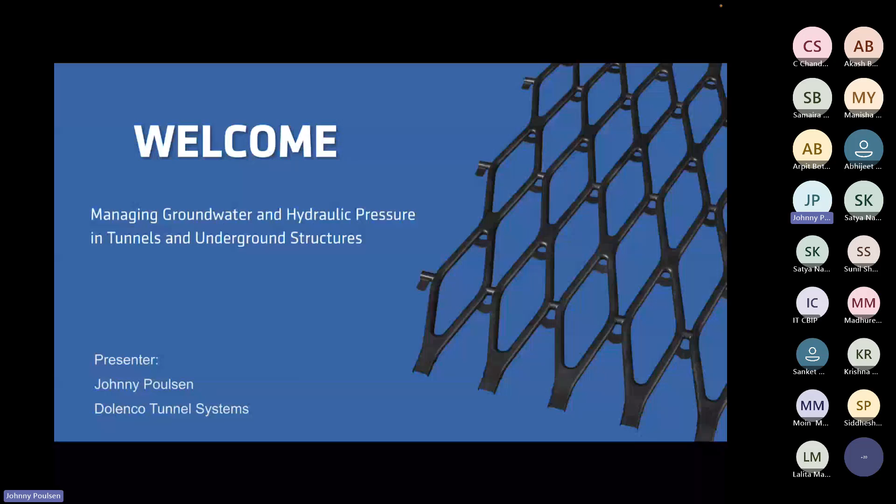When you start a tunnel project, we have to think about this actually quite dramatic work we are doing by removing part of the mountain. What is happening is we are changing the entire dynamics of the mountain. We excavate a whole cavity, and to use this cavity safely over a long time, we build some kind of lining inside it.

The dynamics of removing all this material will change, because it has had millions of years to reach a certain balance in the soil around the cavity. It's very dramatic—the whole mountain will try to find a new dynamic in this new situation. So what does it do? It starts putting pressure into the tunnel, and it also starts changing the way water flows. These factors are very important at the beginning of the project and even over the long-term use of the tunnel.

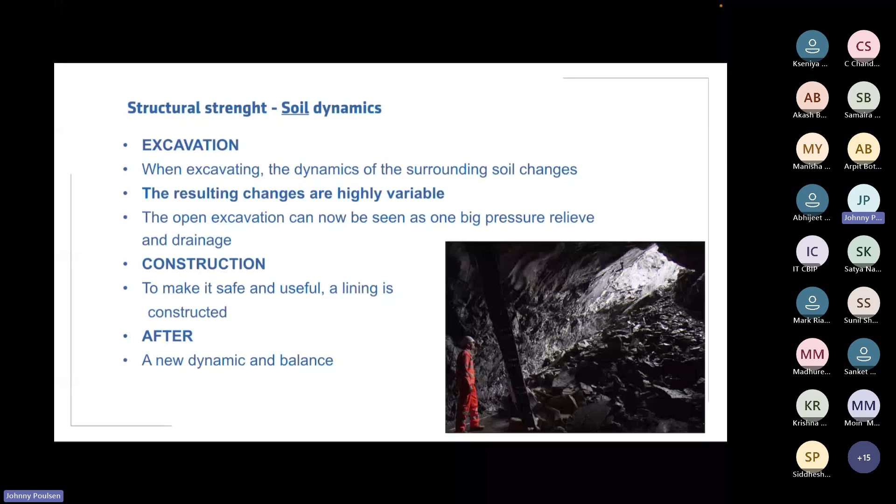These linings are, of course, not without problems when we build them. As you see here to the right, you see some of the water problems we have. We don't know if it's going to be like this before we start digging, but sometimes we see areas where water is actually flowing in, trying to make a new balance inside the structure. So when we have these problems with water coming in, the water pressure and accumulation inside, we have to think about that even when we start excavating.

During construction, we have to make new pre-grouting, or some line drains, or other components of the lining that make it possible to build this lining. If there's too much water coming in, the shotcrete will not stick to the surface, and you cannot really get any further. So we have to have a lot of different tools to manage this, which makes it very complicated to do this lining and make a safe, long-term project and tunnel.

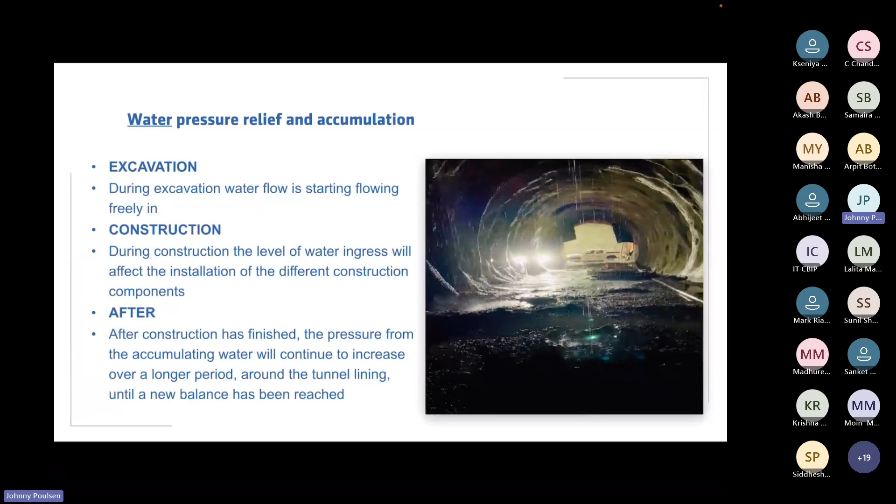So with that in mind, we can look at some of the specifics of what makes it a problem. First of all, we have the safety issue when we are constructing - water coming in, the risk of rocks falling off. We need to make an initial lining that can actually hold the structure while we're working.

When we're doing the lining designed for the individual project, we will often have the need for repairing this lining during construction, simply because water is coming in and damaging the lining. Again, if you're in certain areas, up in the mountains where it's very cold, ice will form. That is also a source of many different types of damage, even fatal, if the ice falls onto a car, onto a train, or onto the roads.

So these are the things that we really want to avoid by making the proper lining design. If we have these different problems, it is very costly to repair them, and it takes a lot of time. Closing down the tunnel is also a big cost for society, and adds to the cost of the problems.

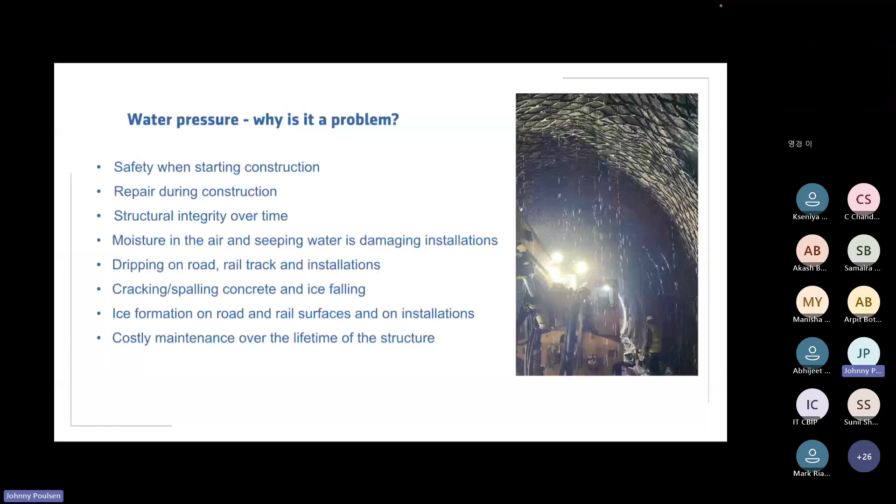So specifically, what are we doing when we have all this water? We're trying first to block the water from coming in by grouting, making waterproofing, so the water doesn't have a chance to get in anywhere. Second, we are using diversion, where we use different types of drains, pipes, or sheets, simply to let the water run somewhere, and this way avoid that it comes through the structure.

The last option, often used since it's not possible to stop the water, is you simply let it drip, and then you take on the long-term problems: repairing, doing injection work, repairing the concrete, and repairing a number of the installations in the individual tunnel.

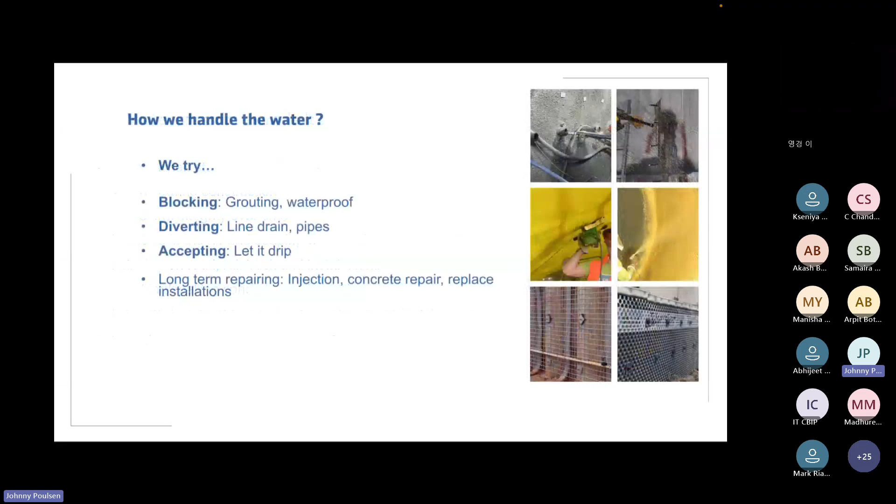So when we are going to design this lining, what are we looking at? First of all, we have the concrete, the shotcrete. For that, we can do a number of things - we can make it fast setting, we can use additives for less cracking, and we can even use very heavy lining, using extra concrete to take the pressure and the water coming through.

We can stabilize the arch with steel girders. We can place anchors, and we can use wire mesh for stabilization. This, of course, depends on what you're talking about - whether you're having hard rock tunnels or a soft rock tunnel situation. Depending on this, you use different solutions, and this can even be within one project, where sections are made in one way and other sections in another way.

For drainage, to alleviate the water pressure, the hydrostatic pressure, you can use punctual line drains, dimple sheets, or geotextiles. Many of the problems come from having the linings separated - the outer lining and the inner lining separated, meaning the inner lining will have to be much stronger because it has to be self-bearing. This is some of the problems we have with using enough space in the tunnel.

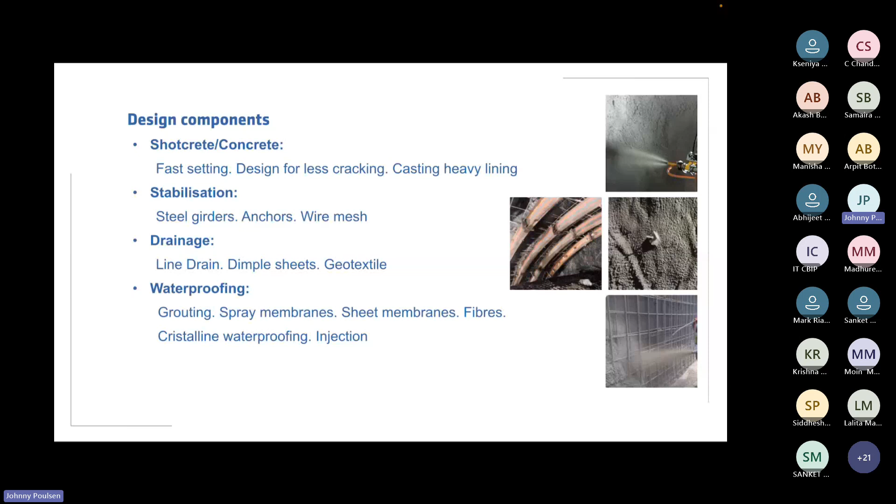Finally, we are using waterproofing as part of the lining, where we start with grouting, spray membrane, sheet membranes, and fibers mixed into the shotcrete. You can also mix in crystalline waterproofing, which closes cracks over time, over the first month or so, when there are fine or bigger cracks in the concrete. And then finally, we can use injection - before any water comes through, or for repair during construction when the water is coming out.

What we are suggesting to do, and have seen really good results in, is to make a systematic drainage system inside the lining. With our more than 25 years of experience with waterproofing of underground structures, we have seen all the problems that occur in these situations.

By putting a stable, full surface drainage into the lining at an early stage, meaning as close to the rock surface as possible, we can receive all the water that's coming in, and instead of letting it go through the lining and come into the tunnel, we lead it along the wall, just to the base.

So this way we avoid blocking the water, because sometimes this would create high pressure, which we don't want. It's very dangerous to have too high pressure there in these projects when we have a thinner lining. We don't accept any seeping, and we also can reduce the long-term repair. So basically, the overall headline is to permanently prevent water pressure on the lining.

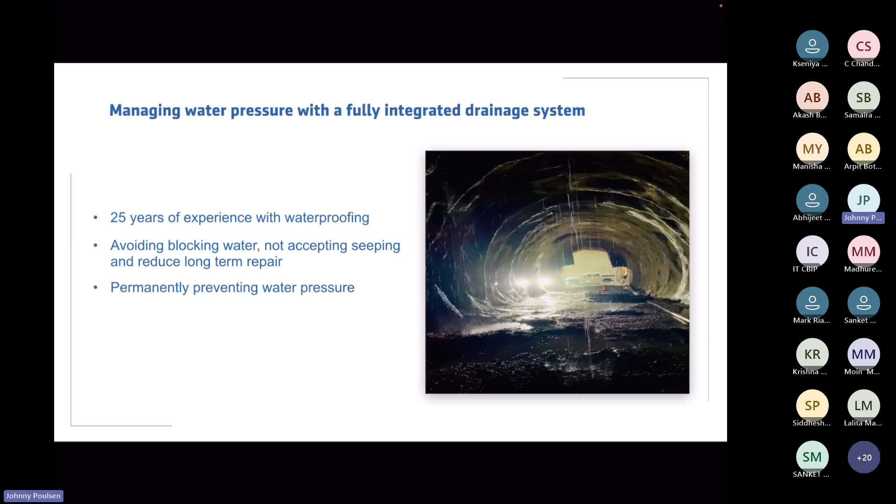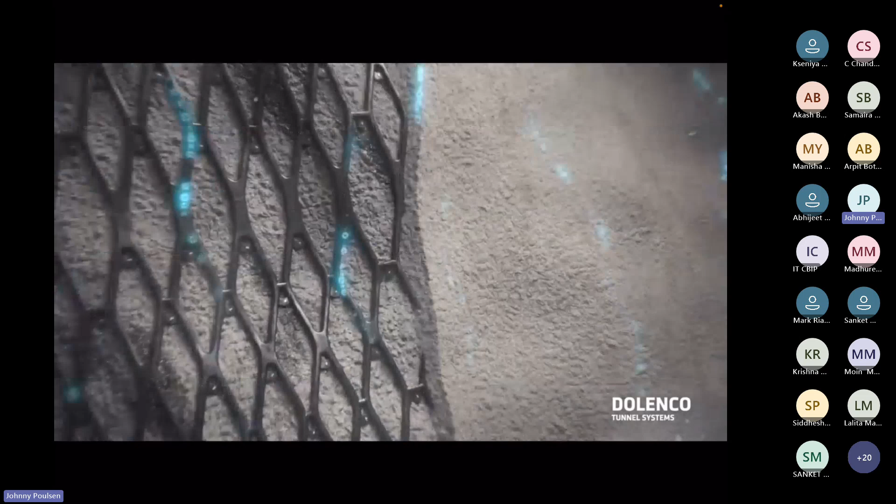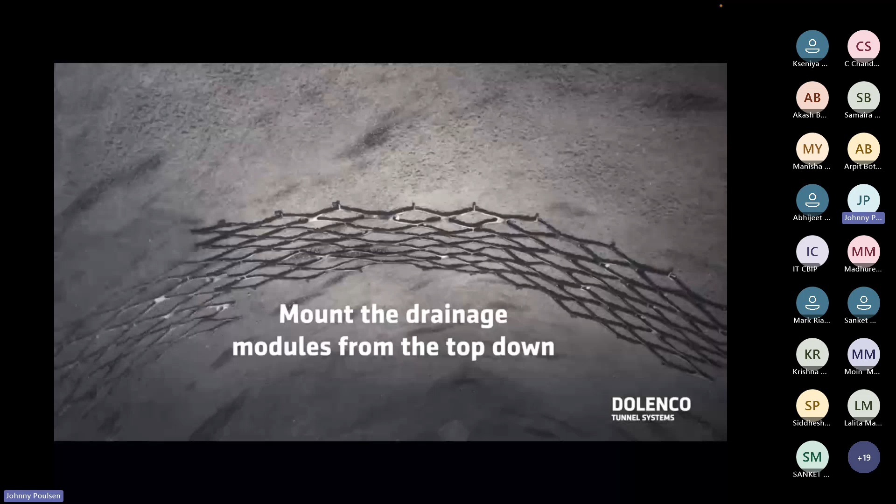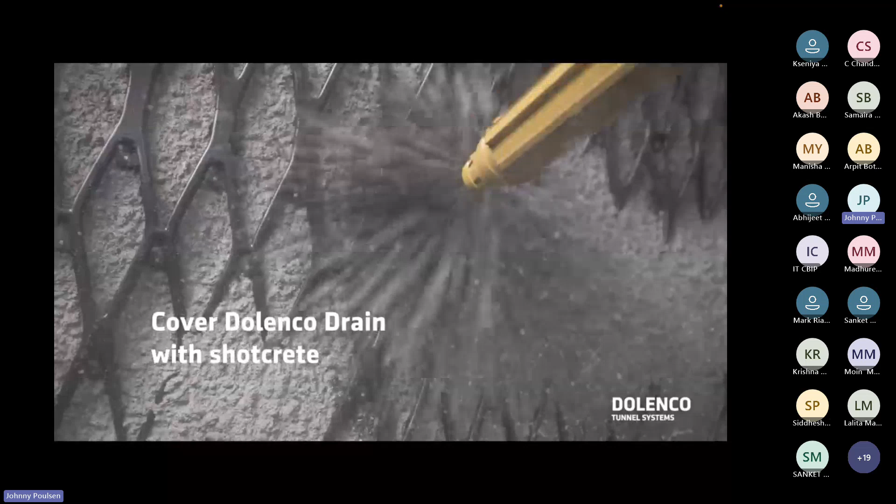Here we see we start at the top and overlap the modules, also horizontally overlapping, connecting. And then we cover with shotcrete. And finally, there's some kind of detail at the bottom for alleviating the water, to lead the water away from there.

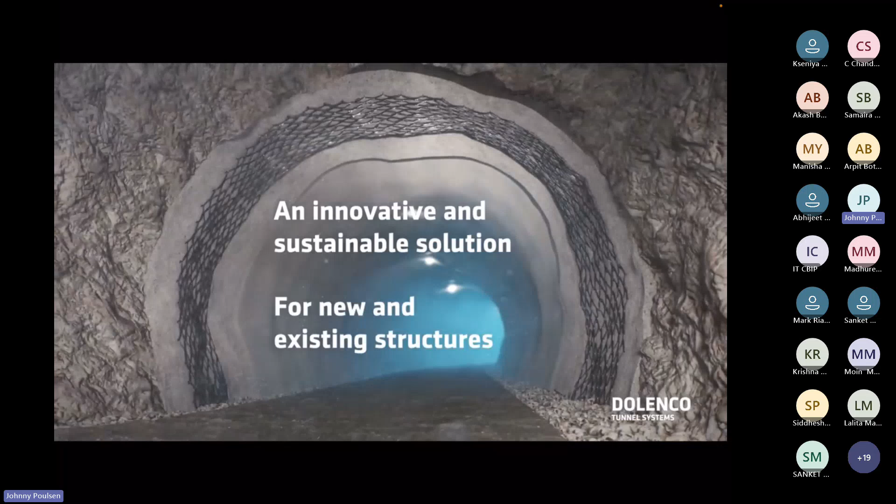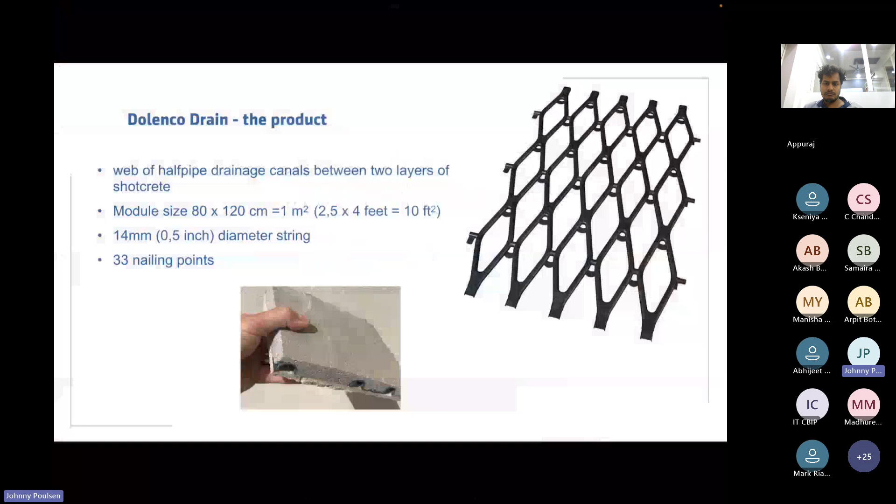So as you saw on the video there, the Dolenco drain is made in modules, so it's very easy to mount to the wall. It is the size of a Euro pallet and only 14 millimeters high, so it takes up very little space. 14 millimeters high with a network of half pipes. As you can see on the photo to the left, you can see the strings which are embedded into the concrete. So we only need very little space to mount.

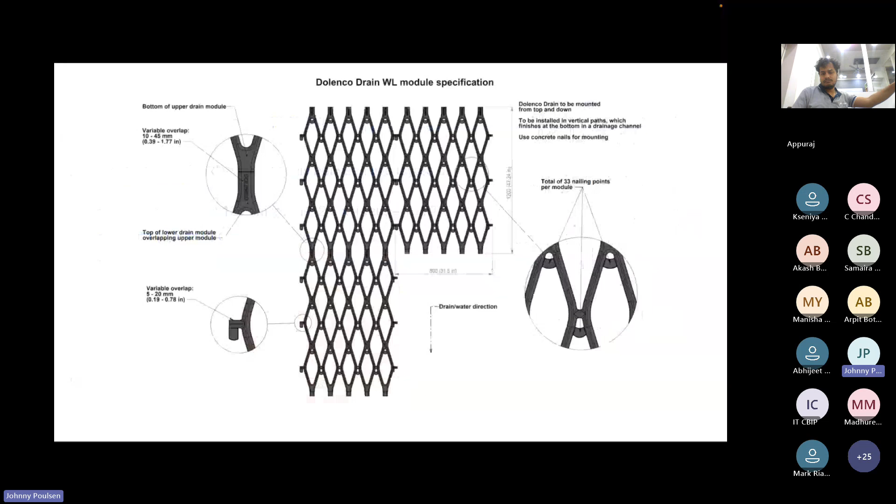So a few facts about Dolenco drain. First of all, the volume of water that can be let inside Dolenco drain is 8 cubic meters of water per linear meter of wall per hour. So this is a very high volume and much more than is really needed. If you have a flow of water of this volume, you cannot get the shotcrete to stick to the surface. So it's a very safe margin we have there.

The solution is permanent since it is embedded into the concrete. It doesn't go away. The Dolenco drain modules are made of either 100% recycled material or recyclable material. Besides using it in tunnels, we can also use it in secant pile walls, slopes, and other applications.

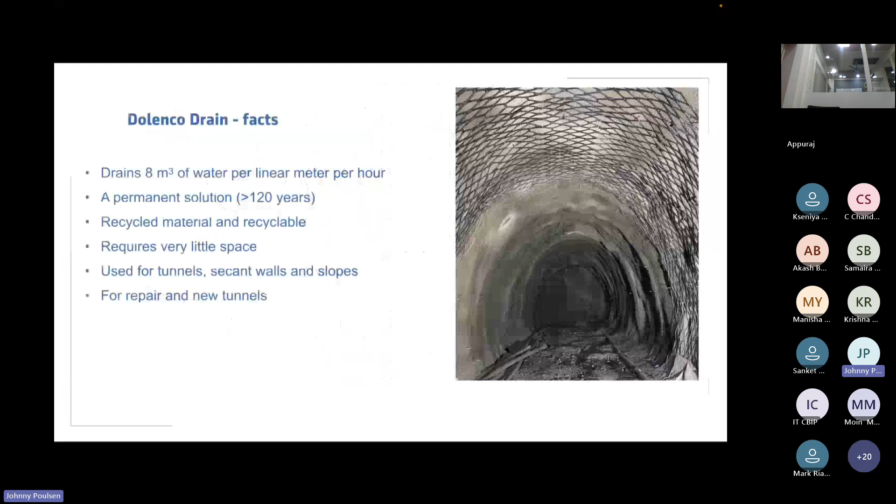Of course, one of the important points here is also that when you have permanently prevented water pressure on the lining, you have added benefits from, for example, protecting the spray membrane. If you use a combination with the spray membrane and you have cracks, you can also eliminate or minimize the injection needed, because the water is not pressured through the lining. It's a very, very easy and quick installation, so it's easy to do the work. And let me show you a small video on this as well.

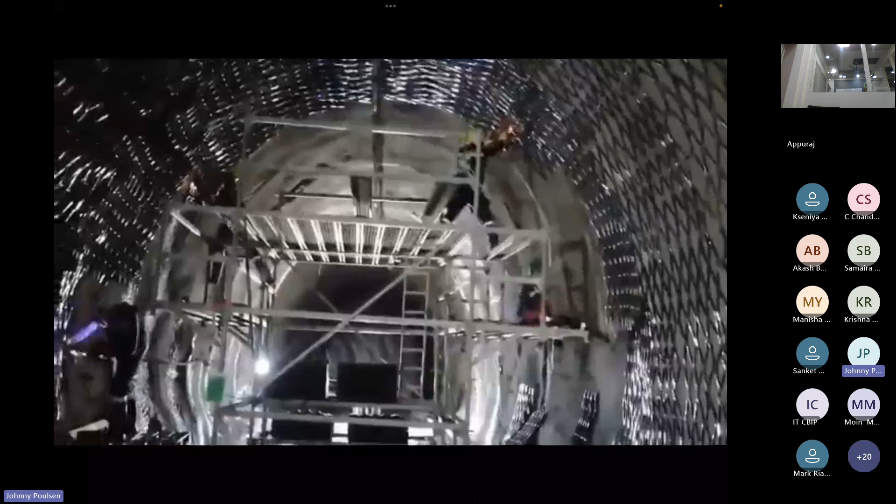Here you see 4 people. And in this case, they use a scaffold. You can also use a scissor lift. 2 people can mount between 12 and 20 modules or square meters per hour. Okay.

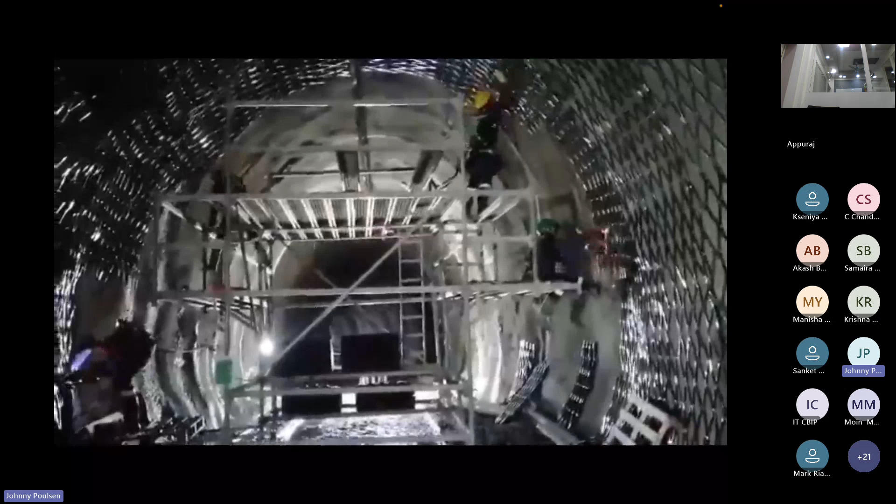So when we look at the modules mounted like this, and when you apply the next layer of shotcrete, you actually have adhesion between the two concretes, the primary layer and the secondary layer. And that means they are both permanent. We have 70% of the surface between the strings, that is for adhesion.

And this also makes it possible for you to sometimes calculate less concrete consumption. So the secondary layer doesn't have to be as thick as first planned because it is now adhering to the primary concrete. So it doesn't have to be self-bearing anymore. So we have a monolithic structure now.

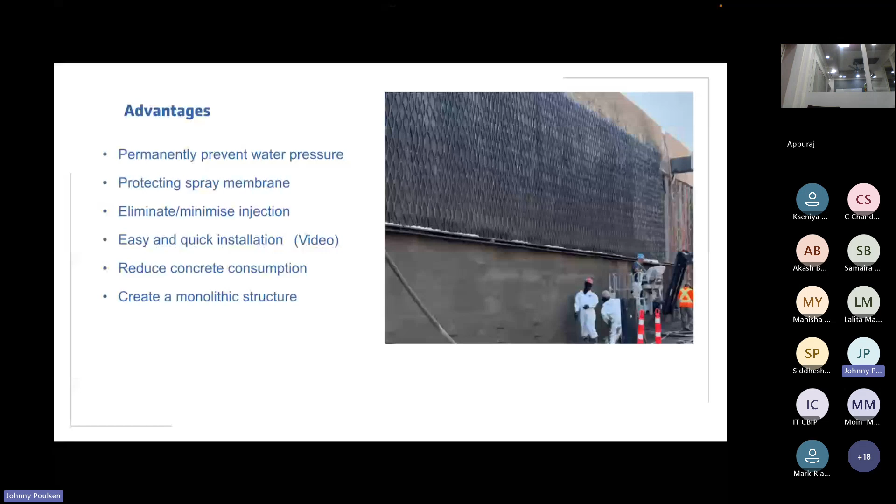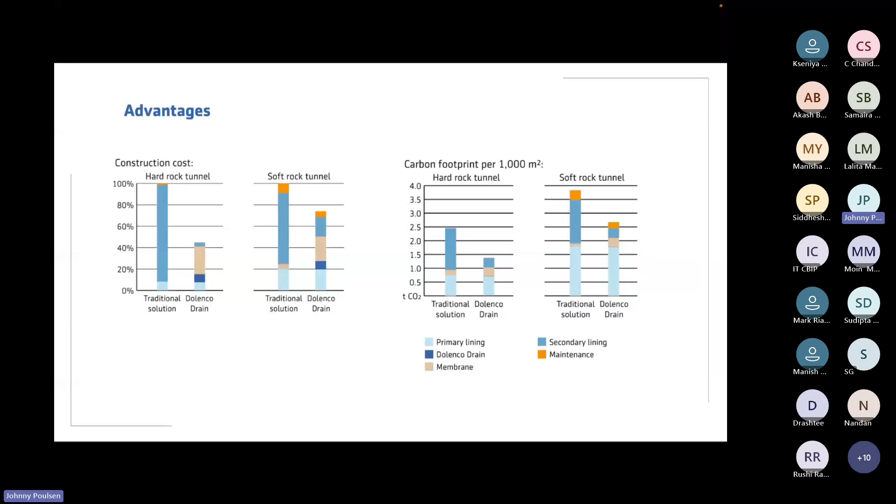Some of the advantages that we've been looking at was the construction cost, the direct cost, the CO2, and the work time. And we have seen significant reduction in all three parameters. First of all, the construction cost, the reduced concrete, the easy mounting does make it a lot less costly. And of course, as a result of this, you also have less CO2.

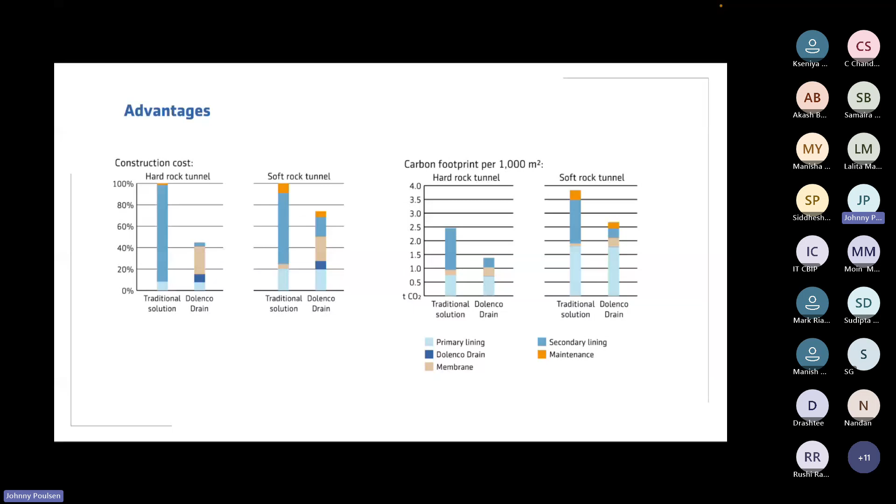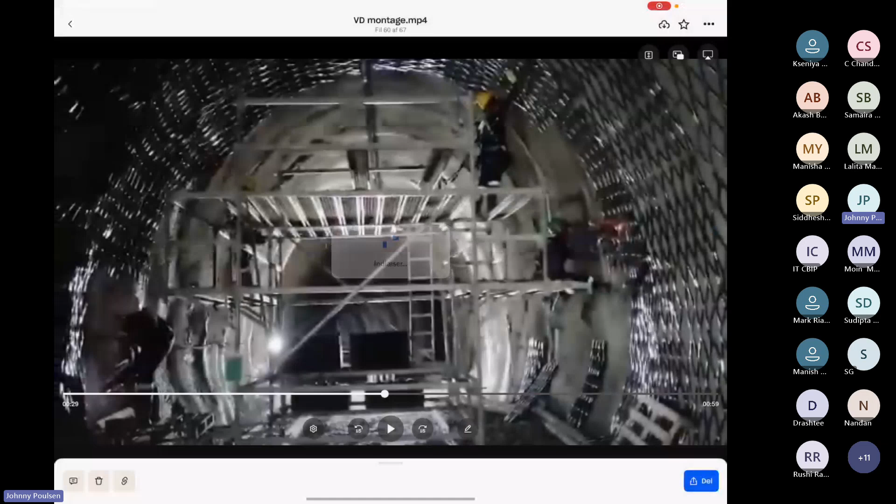So where to use? We talked a little bit about rock surfaces. You can also do it on secant piles, on horizontal surfaces, that can be floors or inverts in tunnels, on slopes. Dolenco drain can be mounted directly onto rock, on brick surfaces, and on very uneven surfaces. I'll go through these one by one now. First, I would like to show you a small video here of the secant pile application.

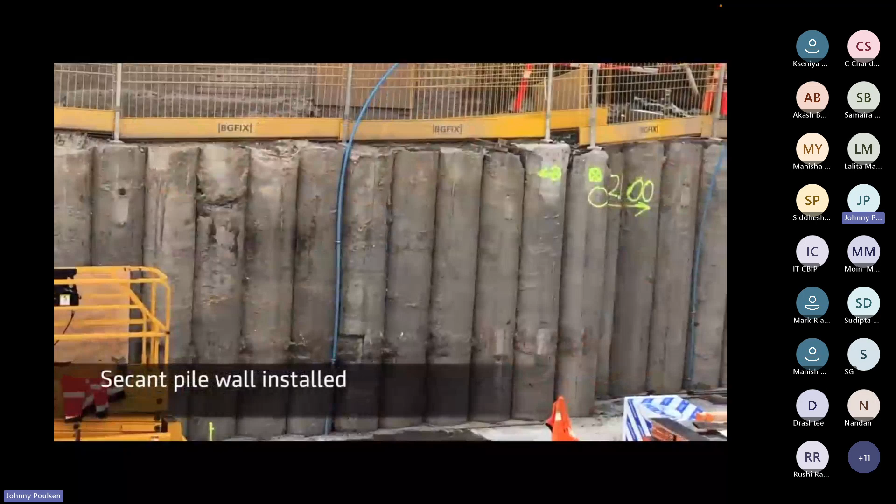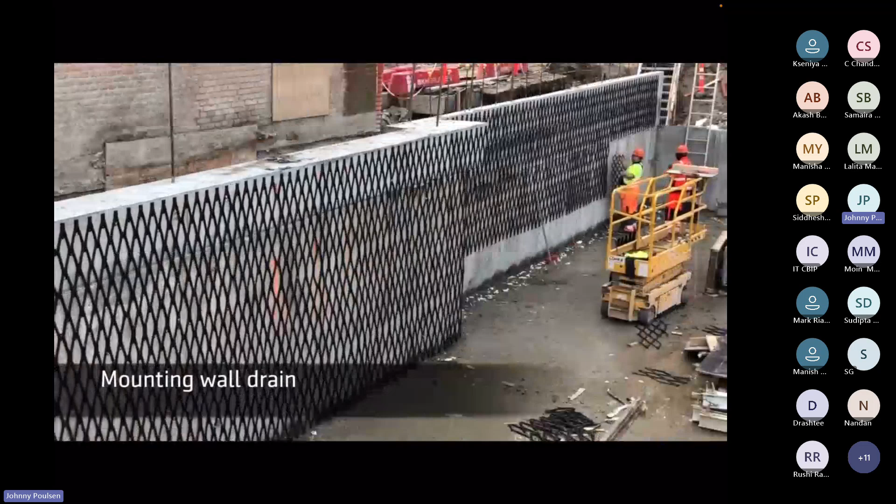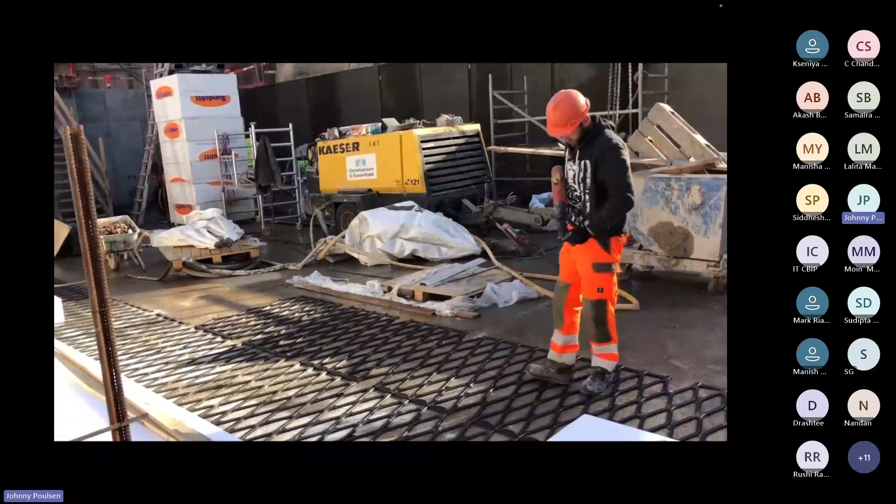So here we see how we level out between the piles, repair the reinforcement, mount Dolenco drain. As you see, it's systematically mounted on the surface with a nail gun. In this case, after applying the shotcrete over the modules, it is also connected to the floor. So the water running from the wall runs into the floor and out to a pump sump, or it can be a drain pipe or other details depending on the project.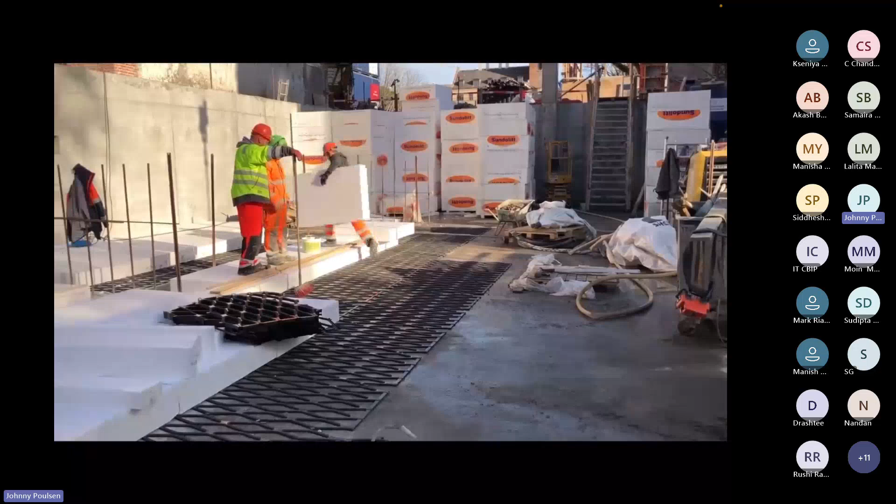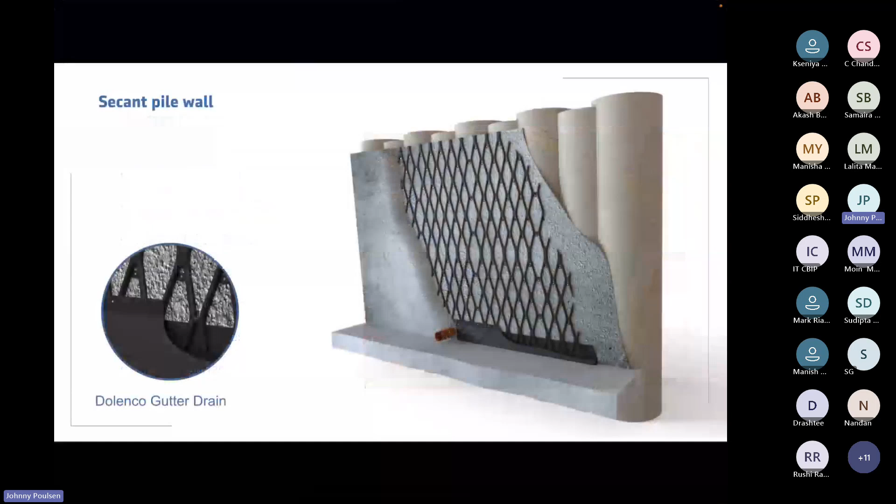It could be a pipe in the middle of the floor in a tunnel, or it can be a canal along the side, or there can be some inspection shafts on the side also, and the inspection shafts, you can also use them to flush the gutter if you need to. And the same principle we see here on the rock wall.

In addition to this, we also have the Dolenco line drain, which is a vertical drain that if you have a lot of water coming in one point, you just mount the Dolenco line drain over the point and lead the water down to the Dolenco gutter drain at the base, the same way as the water is led from the drain mesh.

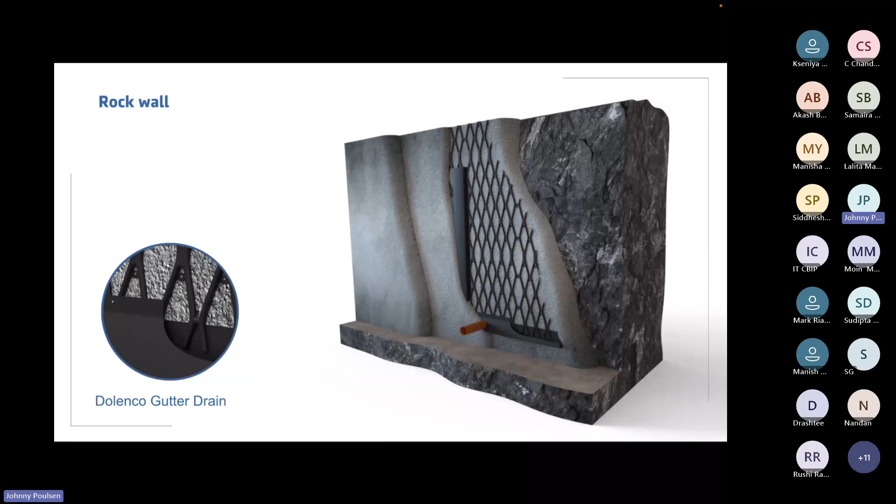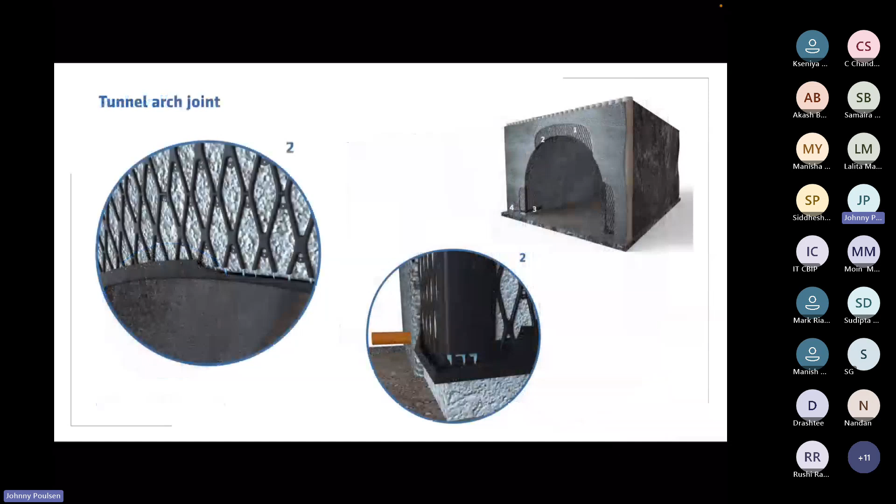Here we see the connection between the tunnel arch and that could be a shaft chamber, or it could be a station wall, where you have a specific drain that catches the water coming down the wall and leads it to the sides and down to the base, into the gutter and out.

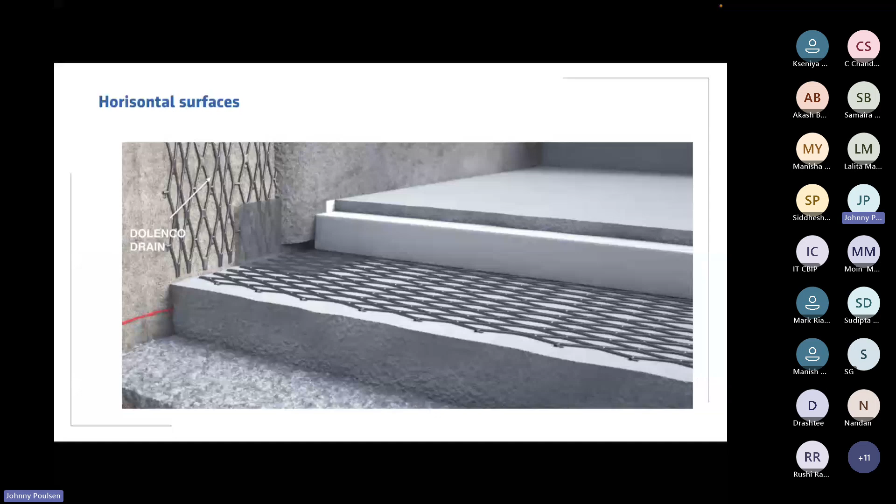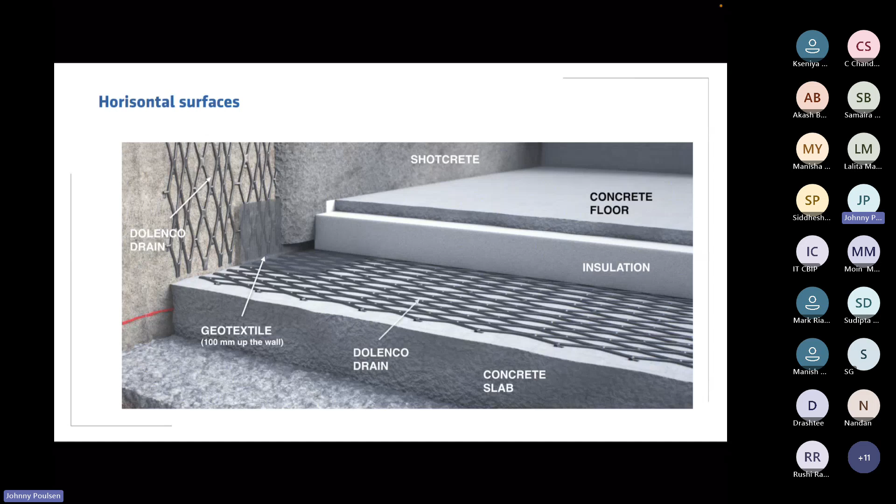Here we have a very simplified version of how to use Dolenco drain in the wall and the floor. So basically we see the drain on the wall, and over the joint between the wall drain and the floor drain, we put a geotextile, so the shotcrete will not block the end of the modules, making it possible for the water to go from the wall into the floor. And then, of course, the water can go from here into a pump sump or other details relevant for the individual project.

Also in slopes, when you have slopes, this could be either hard rock or soft soil. So you would use anchors or soil nails into the surface after a thin layer of shotcrete. And the way you use Dolenco drain here is that you will mount that after the first layer of concrete has been applied with a wire mesh. Put the anchors in, put Dolenco drain on, and then cover with another significantly thicker layer of shotcrete with wire mesh also.

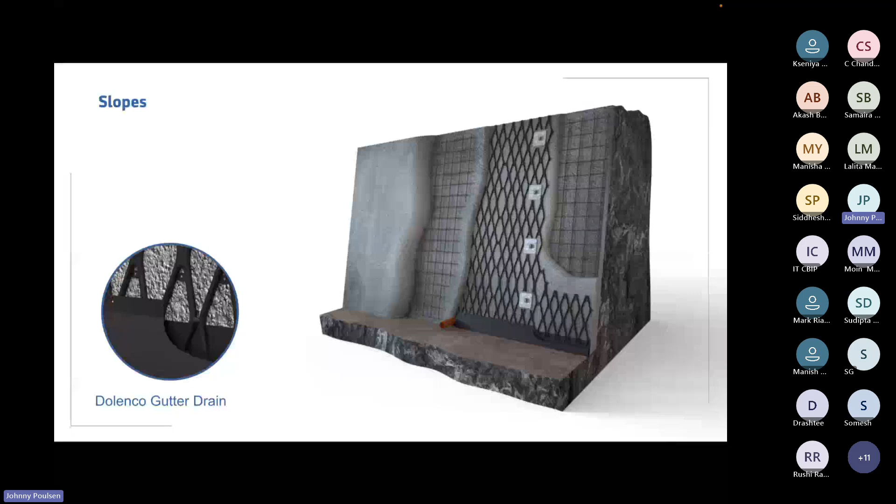In this way, you avoid having a slope with a lot of holes and pipes coming out of the entire surface to alleviate the water out through the surface. Here, you just catch the water and lead it to the base. And in this way, you avoid all the damages that you see on the surfaces from the water coming out. And since the pipes also clog up easily, often you have a pressure that cracks the concrete and the water will come out. When you have Dolenco drain inside this structure, the water will go only to the drain and down to the base. So you'll have a much longer lifespan of the structure.

Now you can also mount Dolenco drain directly onto the rock. This is done if you cannot get the shotcrete to stick to the surface and you don't have other ways of stopping the water. You can basically just put the Dolenco drain onto the wall, mount a wire mesh over it with anchors and shotcrete the whole thing. That will make it possible to get the shotcrete to stick to the surface. It's a very pragmatic solution that actually is functional.

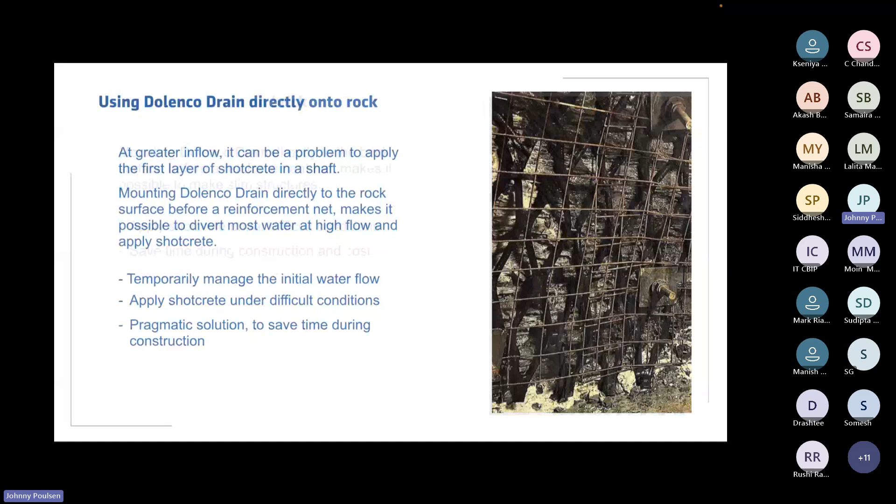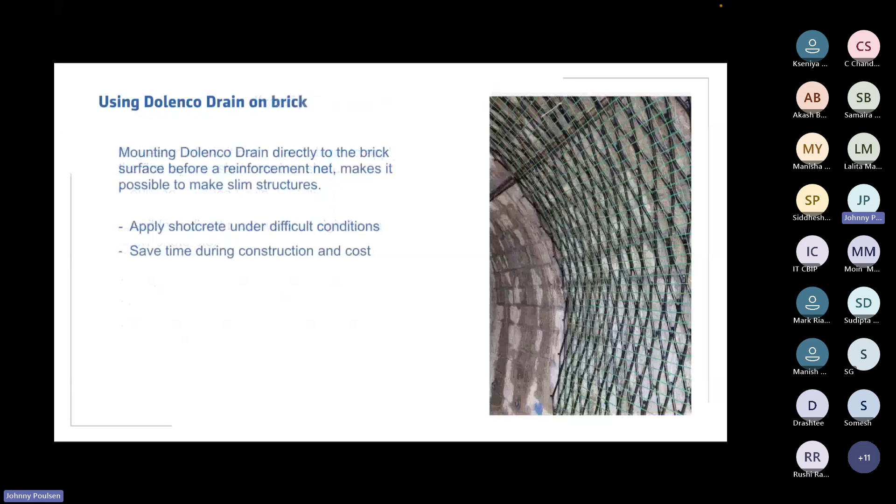Using Dolenco drain on a brick surface is done by combining it with a wire mesh and simply nailing it to the brick surface directly without any shotcrete first, and just covering with a layer of shotcrete. Maybe you want to repair the joints first if the joints are very bad, if the mortar is very bad there. You can do this. You can also combine the inner lining with a spray membrane and another layer of shotcrete. Typically, we don't need more than 50 to 100 millimeters of shotcrete after Dolenco drain.

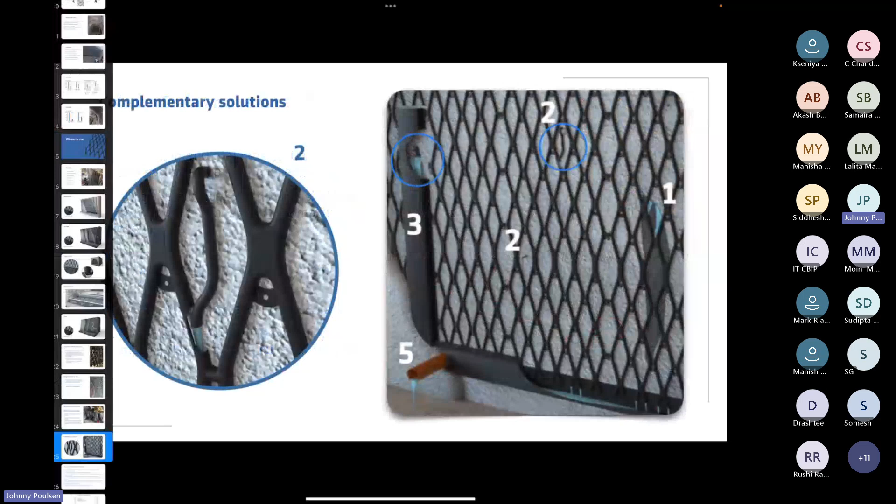As you can see here, we have a very uneven surface. The modules have been made very flexible. This means that they can adapt to an uneven surface. And let me show you a small video on that. Oh, yeah. Here, to illustrate the mounting here.

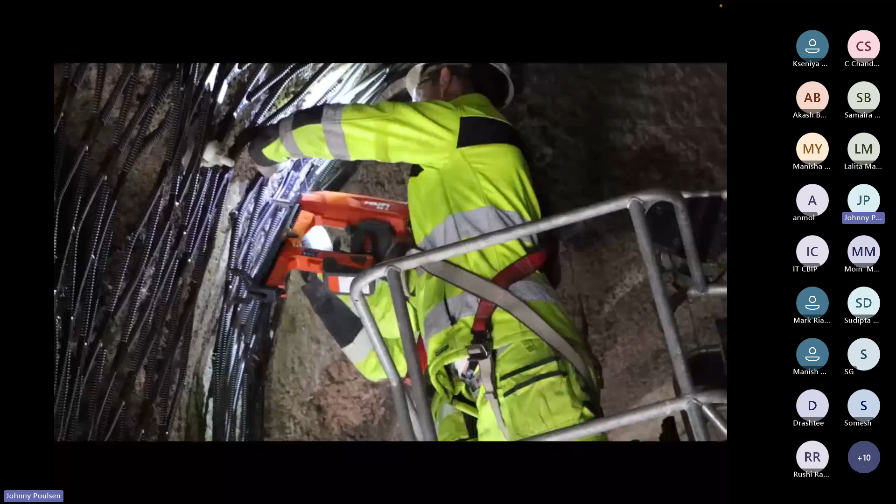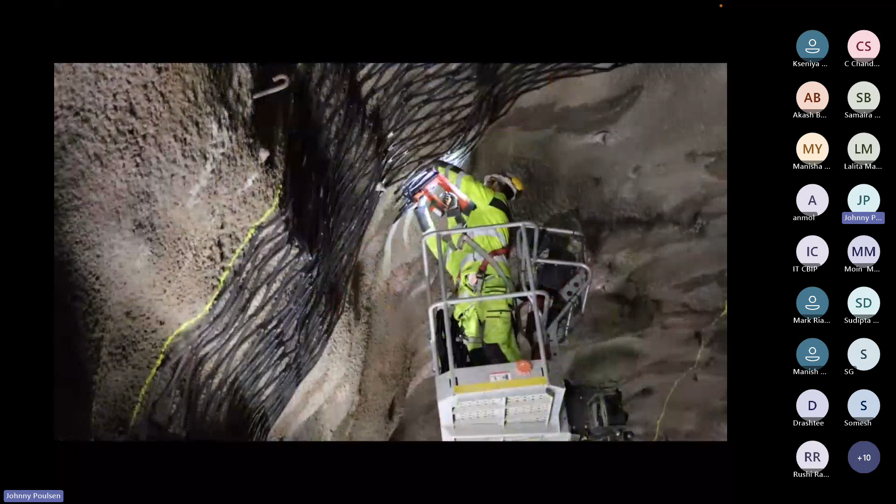So Dolenco drain has been designed specifically to be able to adapt to the uneven surface. The surface has to be wavy, so no sharp edges, and then you're actually good to go. If you have anchors, you can also distort, twist the drains a little bit so it will fit around them. As you can see here, it's just a nail gun and a scissor lift. Very easy nail gun with only a battery, and no big equipment is needed.

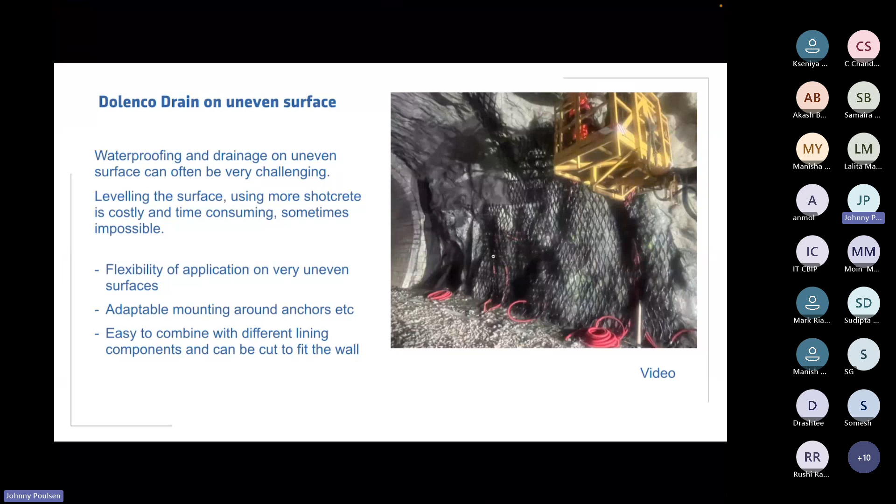So you can actually go in with a scissor lift, with a nail gun and 2 persons, a pallet of product. Dolenco drain is delivered on Euro pallets, so it's easy to take in, go in, start work. And this is, of course, important if you have, for example, the repairing of a rail tunnel, where you only have a very short window of time to do the actual work.

So as I was mentioning before, the complementary solutions, like you see in point 3 here, if you have a point where there's a lot of water coming out, you can alleviate that with a line drain mounted over there. If you have, as seen in point 2, water coming out that can fit into a 10 millimeter rubber hose, we drill a hole into the structure and alleviate it into the string of Dolenco drain, as you see to the left. You see the water is coming out there, and then it's let in there. That makes it possible to shotcrete and to get the shotcrete to stick to the surface. And then, of course, the other parts here, we already talked about that.

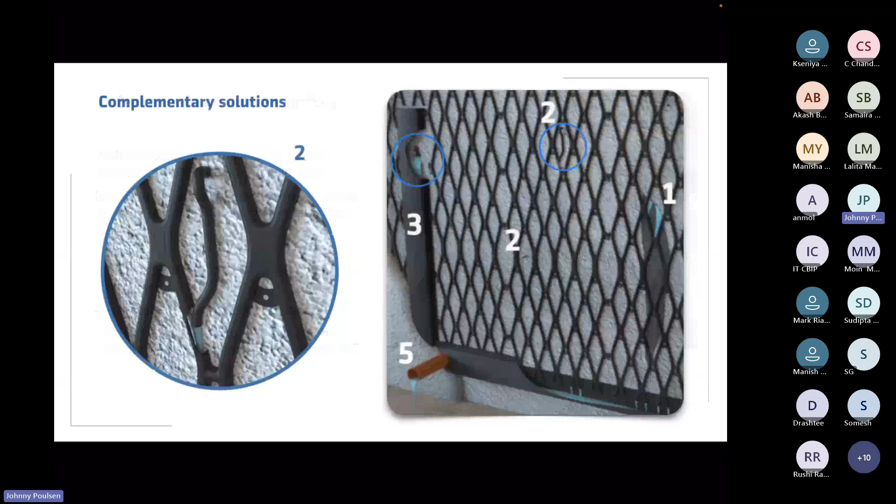So to make sure that all the work has been done properly, we have a number of visual inspections that you can do. So basically, you have to be able to see the water coming out at the base after the installation. And I'm not going to go through all the details here. You will have the slides after our presentation, so you can go through them more in detail.

But it's very important that we have a connecting mesh of modules, so you can see the water coming out at the bottom, and that can be done before putting in any gutter, any horizontal drainage at the base. It can be done by inspecting in the shafts where the water comes out, or you can also make sure that all strings are attached properly, not more than 5 millimeters from the surface. And so these are the things that we have to look at during construction to make sure that everything will go well at the end.

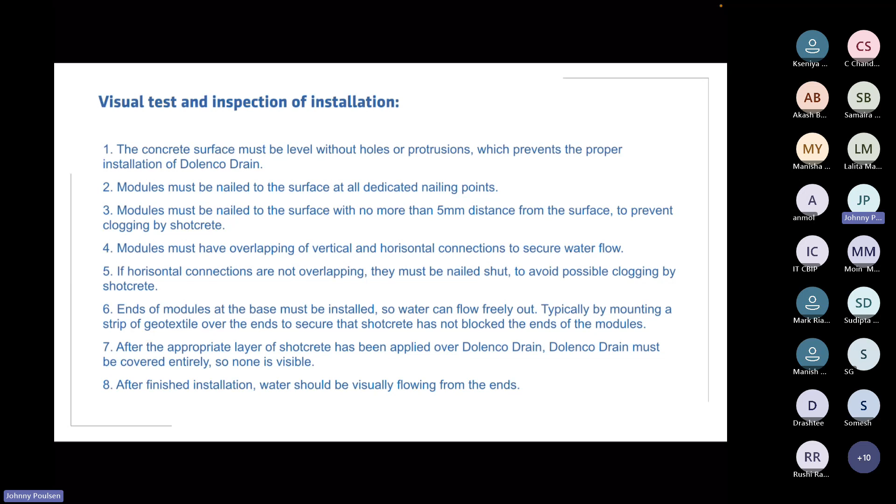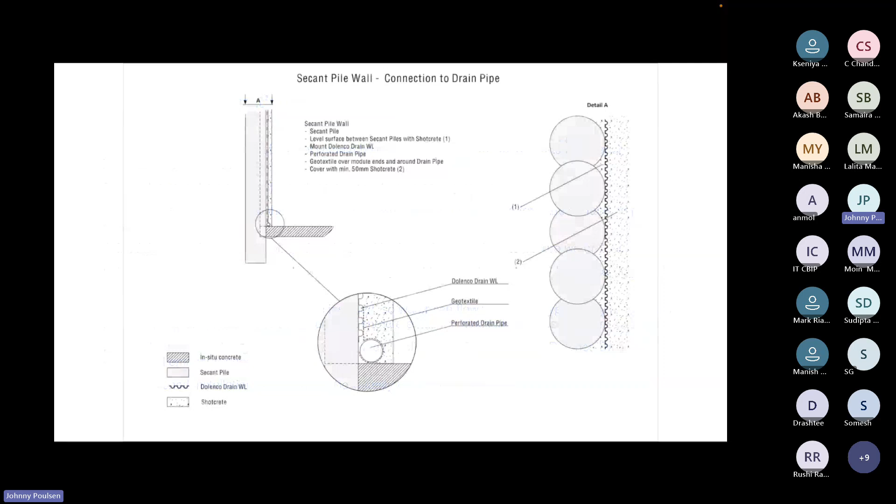About how to alleviate the water at the base. Besides the Dolenco gutter drain, which you saw on the previous slides, it's also possible to install a perforated pipe at the base, in the middle. The water that comes out of the Dolenco drain ends will run into the perforated pipe. And to make sure the shotcrete doesn't clog the end of the modules, we mount a strip of geotextile over the end of the modules and around the pipe.

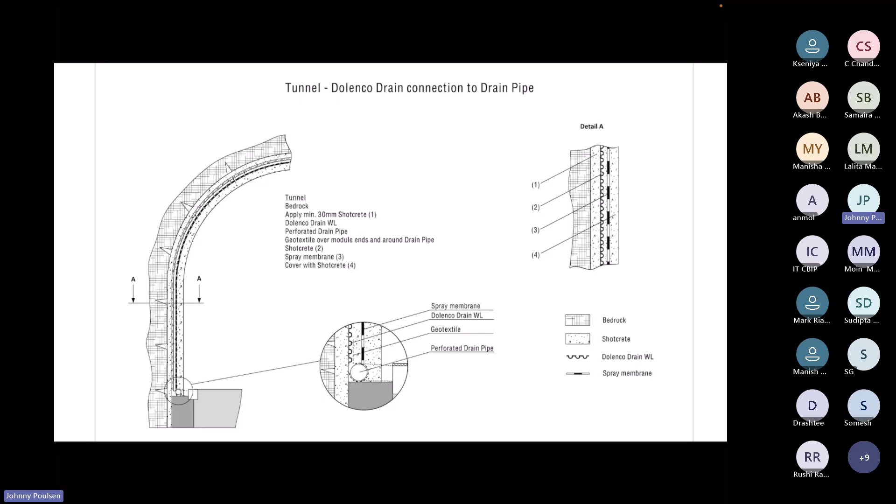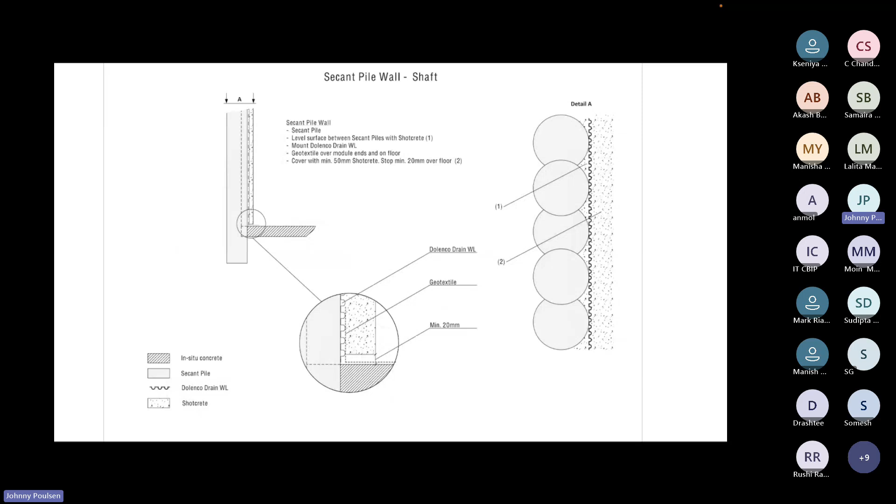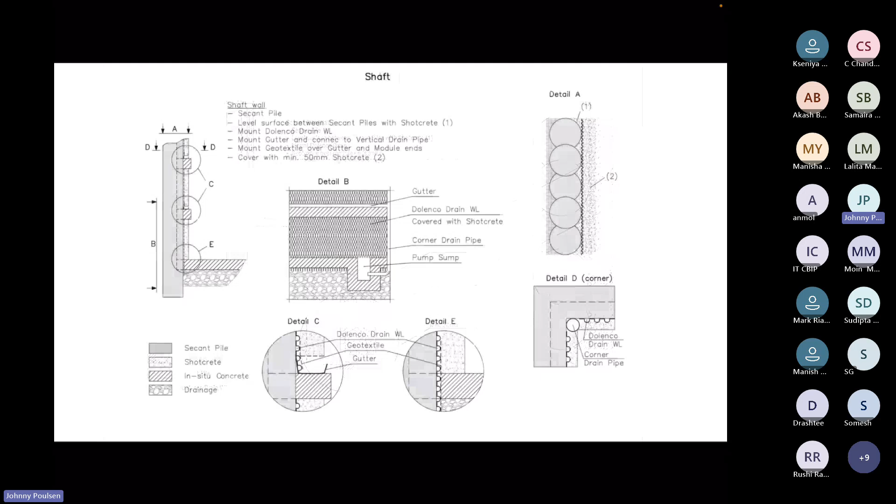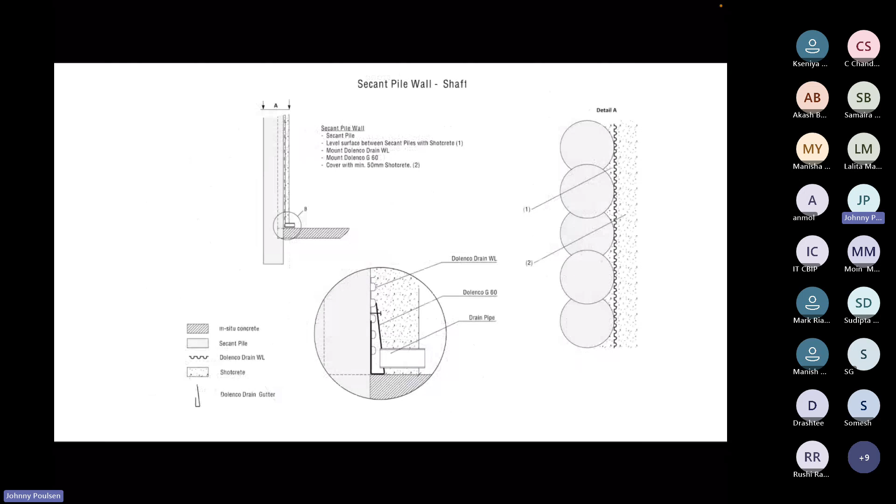Finally, before showing you a couple of projects, here's the schematic of the Dolenco gutter drain. As you can see, it's a gutter which is very slim, only 60 millimeters wide. We designed it like this so it can be used in very slim structures, for example in repair work. Then you mount a horizontal pipe to get the water out, as we've seen in some of the previous slides. The only thing you do is nail one side onto the surface at the top, and that's it. So it's a very easy mounting system.

So finally, a few projects.

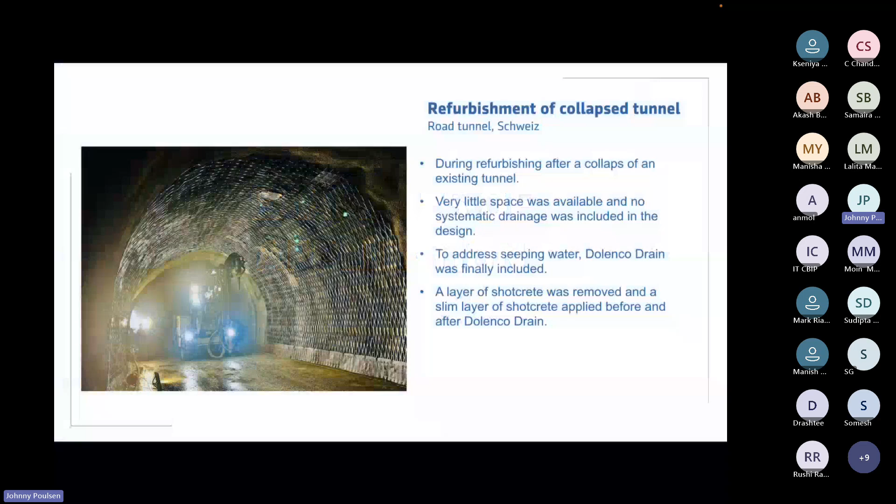Here we have first a road tunnel, and this road tunnel actually collapsed. After rebuilding the lining, they put on shotcrete without fibers and mounted Dolenco drain, then covered it with shotcrete, and that was it. That was all that was done there. Let's have a short look.

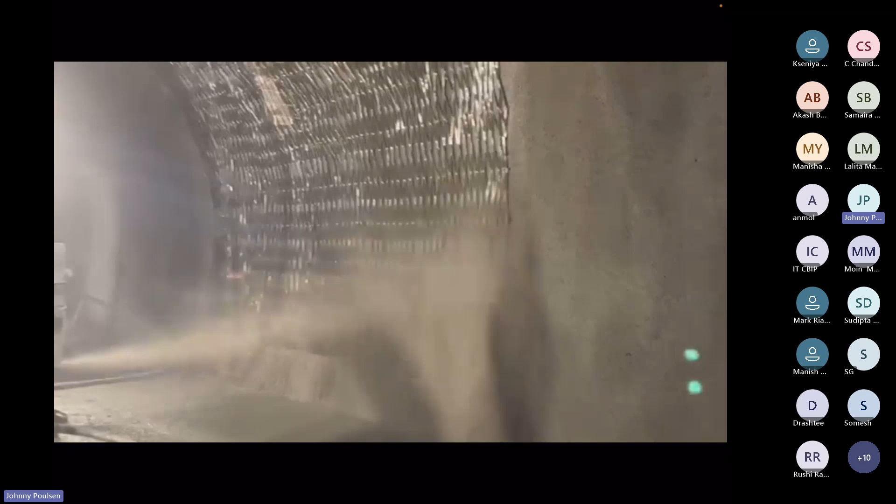This project is from Canada. In reality it was two tunnels where the wall in the middle was removed, and to support the arch a number of steel girders were installed. The first design was with a spray membrane and shotcrete. During construction there were problems with water coming into the spray membrane, and for that reason the designer changed the design during construction to include Dolenco drain behind the spray membrane. So the water would be caught by the Dolenco drain, and the spray membrane would have time to dry out so it could function properly.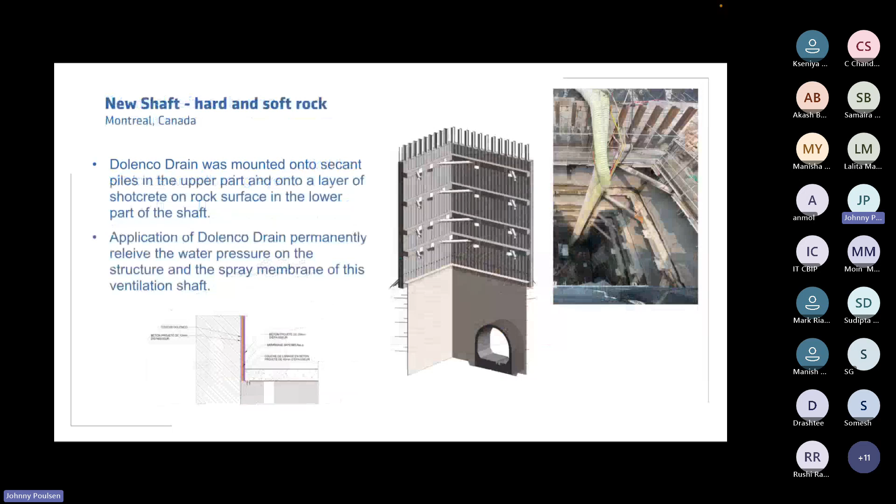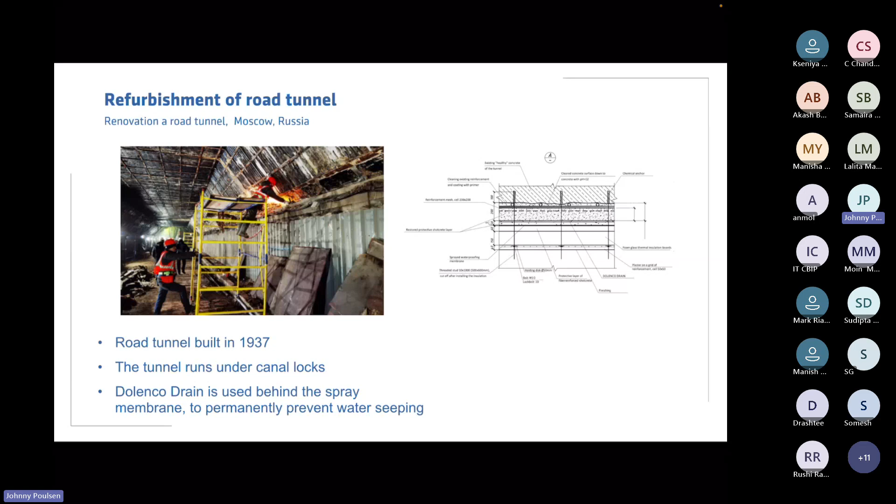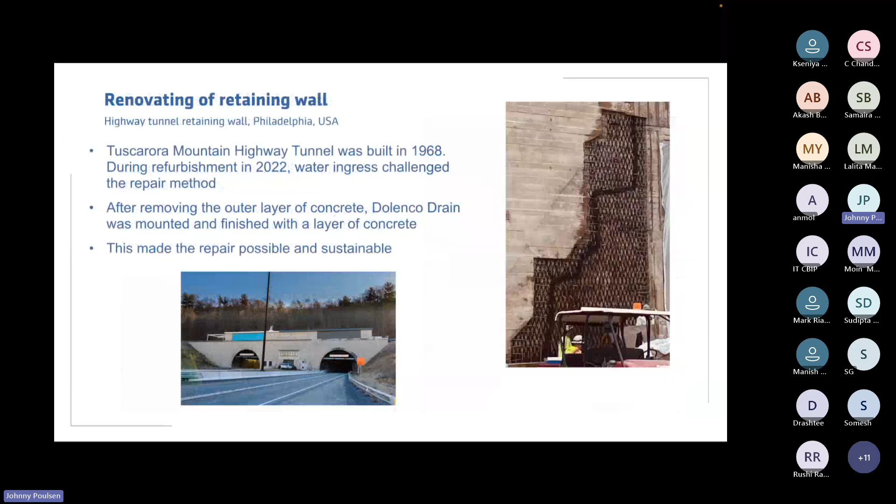Here, a retaining wall, where the only option was to remove 10 centimeters of concrete, mount Dolenco drain, and then cover again with 10 centimeters of concrete. This is another type of application in a road tunnel.

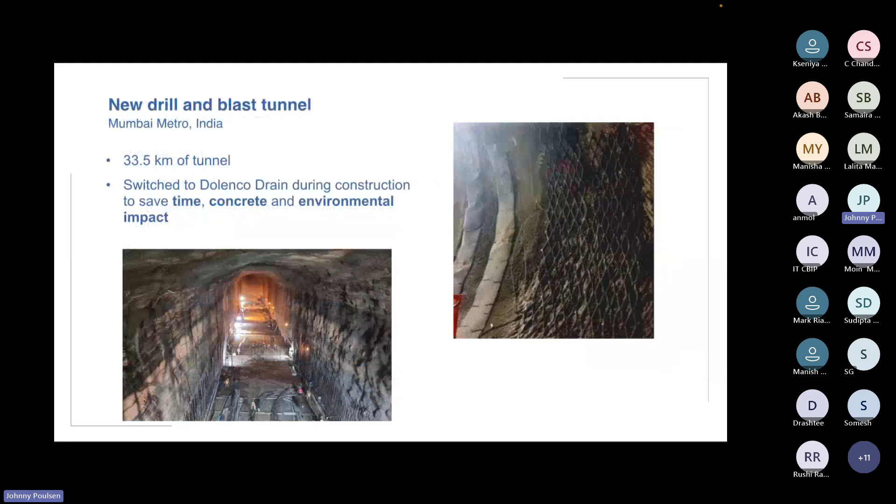Here, rail tunnel in India, in the Mumbai Metro, where they had changed the design from a double lining with a sheet membrane to cast concrete to spray shotcrete. Because of the use of shotcrete, they used this because it was faster. They had some time pressure there, and for that reason they also included a number of different drainage methods, including Dolenco drain and some line drain, which you can see, which is not our product, on the left, and Dolenco drain. And I think that was actually the first time using spray membrane in these Indian metros. Yeah, I think that was the first time.

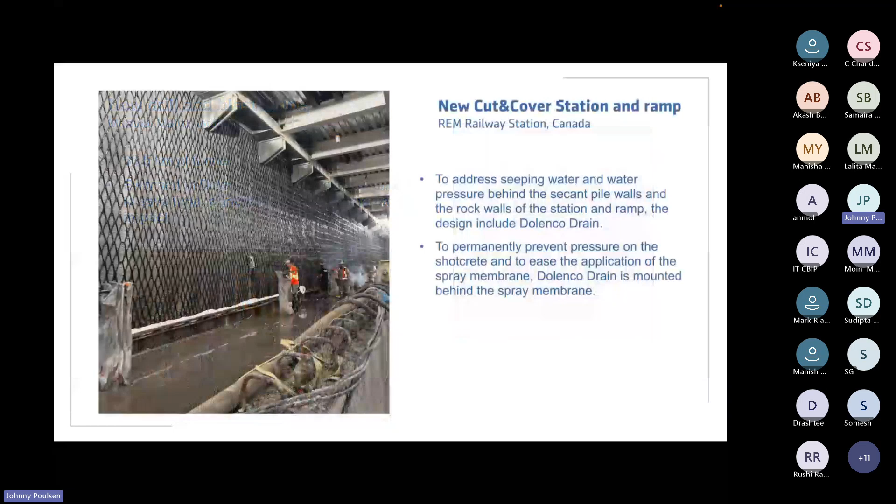Here, finally, the last reference is an underground railway station with secant piles, where you can see they have leveled out a little bit, so it has a wavy surface, and then putting on Dolenco drain, shotcrete again, and spray membrane. Also the ramps were made like this before going above ground. So this is the station and ramp.

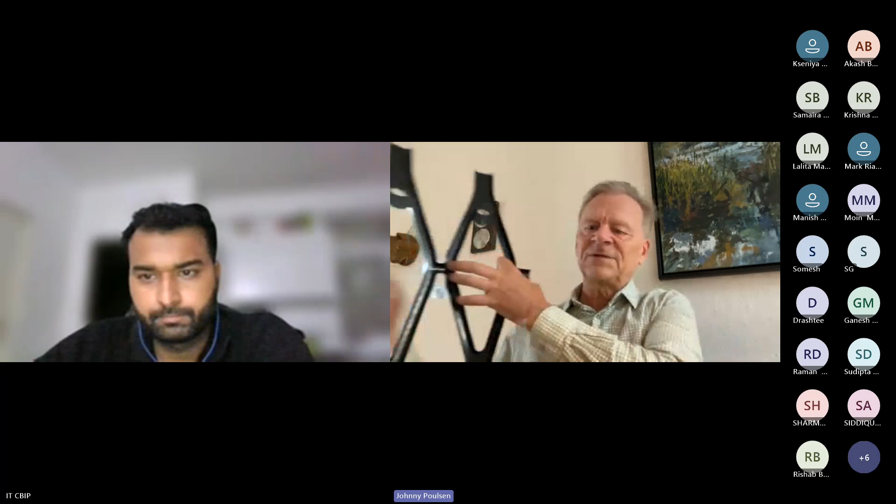I actually have the mesh here. You can see how elastic it is, and you can see the profile and the canals here. They can take much more water than we expect. So when the water comes in, it will be seeping into these channels - it will not be flowing like full streams, just a little bit seeping in some of them somewhere. That's how you do it - you just make sure that none of this water accumulates inside the structure, only the residual water.

Also, I would say a lot of it is what you call secondary water table - rainwater and such. So it's secondary water that comes in when there's more pressure on, maybe when the river is rising sometimes. So that's what it is.

Okay, there is another question from Samaira Bansal. We have a case where a concrete lined tunnel is dripping through cold joints. How can Dolenco drains help us with that? Will the lining need to be chipped, or will installation of drains and the gutter and shotcrete over it be enough?

I don't think you need to chip it out first when you use the Dolenco drain. What you need is to clean the surface, install the Dolenco drain, and cover with shotcrete.

This is a very specific question from a real project, and I'm always careful about answering that - I always want to ask more questions. So I suggest that if it's a specific need you have, we set up a separate session, an online meeting where we go through the details. Maybe you have detailed drawings, pictures, a video from the place, and we can discuss how to approach this the best way. We will be very happy to do that.

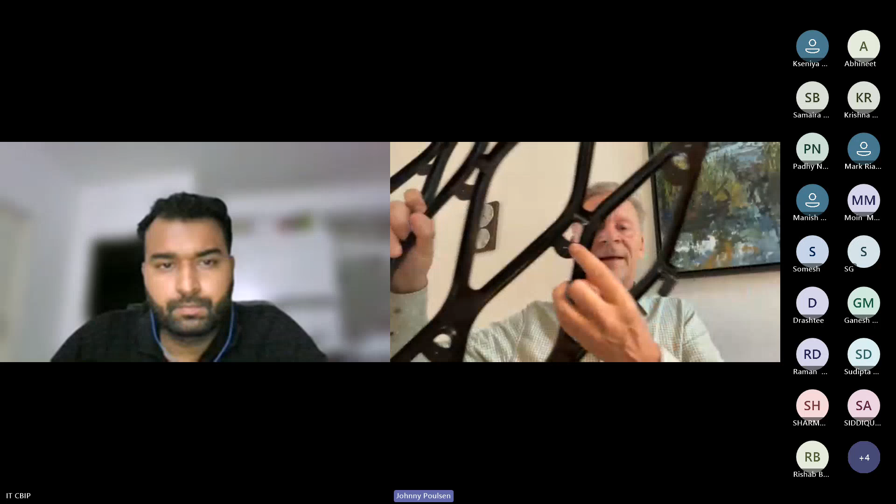It really doesn't matter about the nails, because what happens is you should look at the nailing as a temporary measure. You see the nailing points here - we have nailing points all over the module. When you have nailed it onto the surface and covered with shotcrete, you have 70% of the surface free for adhesion between the concrete before and after, and that's what actually keeps the structure monolithic. So when you design a structure, you have to calculate with 70% adhesion of surface.

So the focus should be on how is the adhesion - do you need a primer if you have a very smooth surface of the initial shotcrete. This is what you have to look at here. We have never had any issues about this adhesion situation. It's not about the pull-out test - it's not about the adhesion of the mesh to the surface, it's only about the concrete, right? And that's what you have to count on for tensile strength.

Tensile, yeah, tensile strength. Thank you. Yes, I'm from Denmark, so English is not my native language. That's not an issue, sir - you are speaking very well.

There is another question from Sudipta Das. What is the advantage of the Dolenco drainage system instead of perforated drainage pipe and weep holes between rock bolts below the secant pile, where the slope has been cut up to the bottom slab in grade 3 rock?